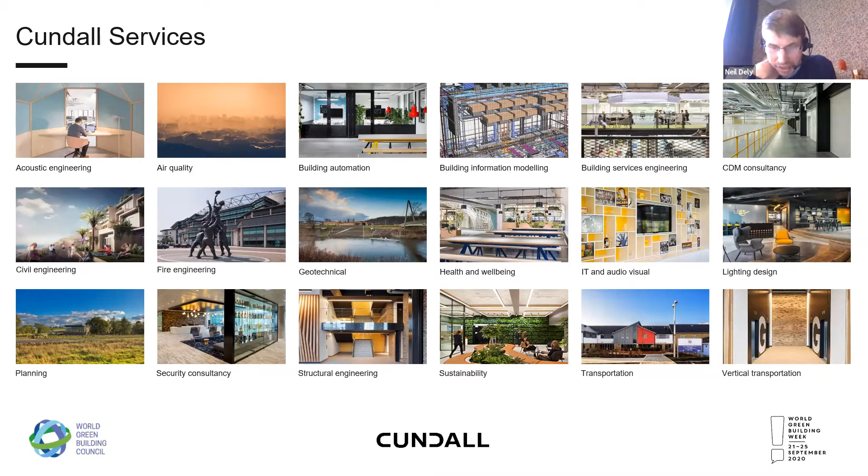We need all disciplines to collaborate to address the climate emergency. And while Cundall offer multidisciplinary engineering consultancy, we achieve the best outcomes when we're working collaboratively with like-minded clients and developers and architects and quantity surveyors and PMs and agents and so on. Next slide, thank you.

So I'm sure you're all aware of the climate emergency. In the recent BBC documentary on extinction, David Attenborough said that habitat reduction is perhaps the most urgent issue to address, but that most scientists agree that climate change is the greater long-term challenge. Next slide, please. And this is a telling slide.

And this will be familiar to you all, I'm sure. Over the past couple of years, we've seen the impact of climate change, and it's become more severe and widespread, and that ranges from the recent and current forest and bushfires in America, previously in Australia, Southern Europe, and the flooding that we see regularly throughout our country.

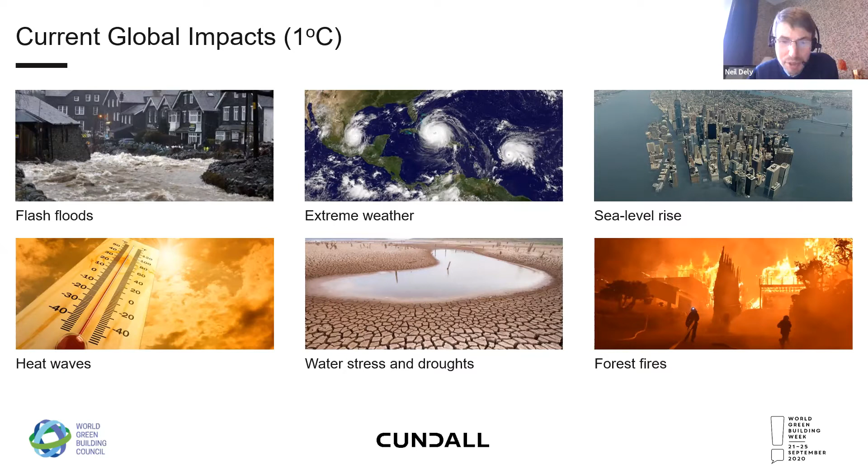It's therefore vital, as I said, that we act, and really, in order to achieve a reduction on the scale required, we need a complete societal transformation to flatten these emission curves that we are seeing and allow our ecosystem to recover and cope. And achieving net zero carbon must be at the heart of our response to this. Next slide, please. So here's a little timeline.

It's not a competition, of course, but what will make us change? And at the most basic level, government regulation will drive us to improve our game. Back in May 2019, the Scottish Parliament declared a climate emergency, and our own government set out legislation to become net zero by 2045.

The UK government then followed suit in June, amending the Climate Change Act, committing the UK to net zero by 2050. And previously in the UK, as I'm sure a lot of you are aware, we'd only ever committed to 80% of that. Unfortunately, the very next month, the Committee on Climate Change reported that the UK was already falling well short of that 80% target. And of course, this implies that it's going to be very difficult to get to this 100% target that we've got between 2045 and 2050. Next slide, please.

And the next driver for change, so if that's sort of national government, the next driver for change can be found in local authorities, and most major UK cities have now declared that they'll be carbon neutral well in advance of that 2050 target, and over 70% of the councils in the UK have declared a climate emergency.

Part of the attraction to cities is that bold climate change action can deliver many benefits, such as better health and well-being, improved air quality, economic savings for individuals and businesses, new jobs, less congestion on our roads, cleaner and greener spaces, and so on.

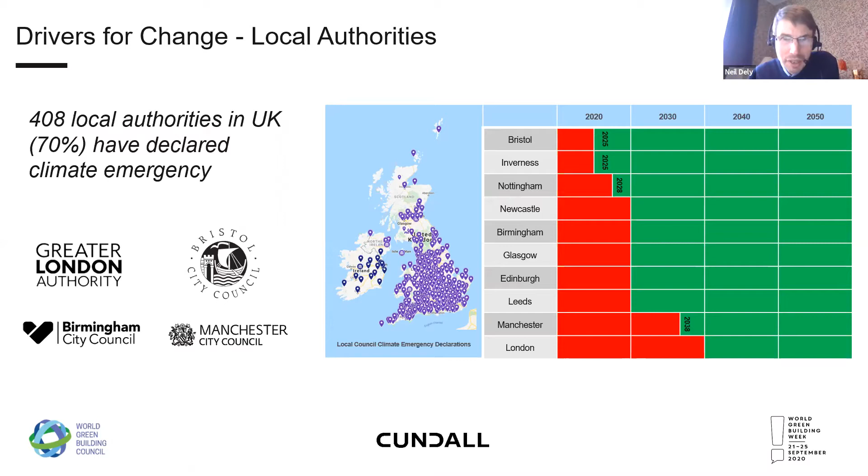So next one, please. And finally, so we've gone from central government to local government, if you like, and then finally the drivers for change. And maybe in some cases this might be the most important one. The drivers are to be found in investors, developers and occupiers.

And it's been good to see a whole swathe of these people sign up to various commitments and the net zero carbon building commitment, and people like Argent and Grainger and Jones Lang LaSalle and Lendlease, to mention but a few. So this is really good when it's also being driven through these type of folk.

So having said all of that, I hope that's whet your appetite. We're now getting on to the really important part of today's talk, the climate triage. And this obviously has a medical connotation, and Sophie will talk you through that.

And to do that, I'd like to introduce you to Sophie. Sophie leads our Edinburgh office sustainability team. Sophie's passionate about delivering low carbon and zero carbon buildings, working with clients to achieve their targets in a commercial world, and all the time looking to give the best possible outcomes for the comfort and well-being of occupants. So I'm very pleased to pass over to Sophie, and she'll take you through the rest of this talk.

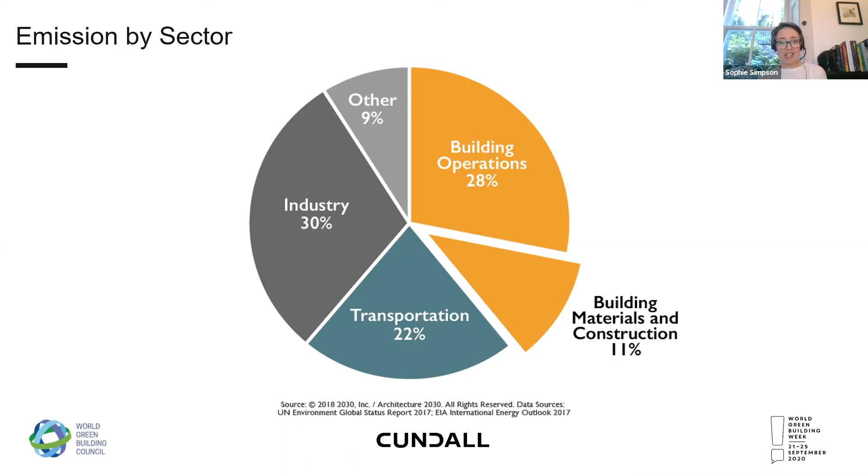In recognition of the role the built environment has to play in tackling climate change, we're now starting to see a consensus among industry in terms of the level of action that needs to be taken. The World Green Building Council has set out their roadmap, and this outlines that by 2030, all new buildings must be net zero carbon in operation. Then by 2050, all new buildings must be whole life zero carbon, and all existing buildings need to be zero carbon in operation.

But in summary, we're essentially looking at first reducing construction impacts and optimising operational performance. Subsequent to that, increasing the renewable energy supply. Then after all this, we again review our resulting carbon balance and identify opportunities to offset. This is a whole different presentation, which I'm happy to expand on if anyone is interested, so just contact us about that. But our recommendation is that it's ultimately a last resort, or at least a short-term fix in any strategies towards zero carbon.

Just to give a bit of an understanding of carbon offset, if people aren't familiar with that, it essentially represents a fee that's paid to enable a reduction of emissions in carbon in order to compensate for emissions made elsewhere, i.e. on your particular project, for example. Offsets typically support projects that reduce the emission of greenhouse gases in the short or long term.

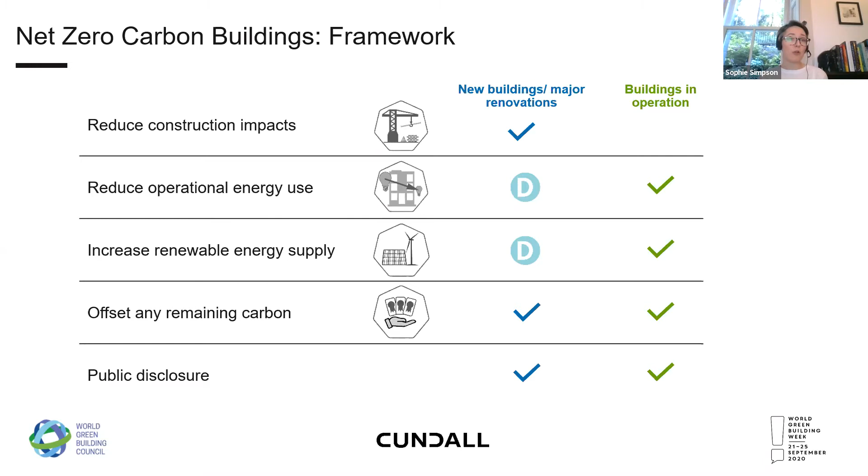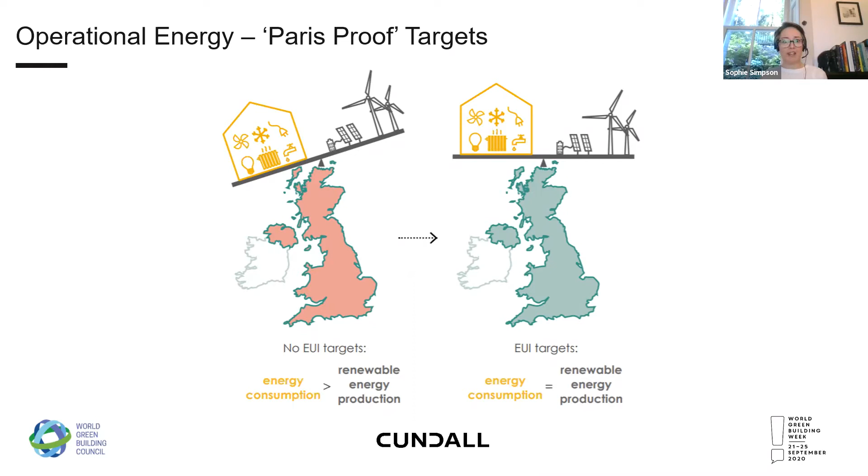So this slide helps to reiterate some of these points, indicating how the building energy use associated with each sector needs to reduce over time, up to a point where this can be matched by the increasing availability of renewable energy, i.e. the point at which we achieve our net zero carbon economy. But we have a lot to do in terms of changing our mindset regarding how we have operated to date. Yes, we have been making inroads, but this has not been getting us nearly far enough. If we continue as we have, we'll get the same results, and I think that's maybe the definition of insanity. But we really need to be pushing further and harder in order to get to net zero carbon.

So other opportunities are that we can include consideration of sharing energy streams across a site. So for example, can we move heat generated in one area to another? So if we have offices that have a cooling requirement, then can we take the heat generated in those areas to heat the residential, or can overheating in classrooms be transferred to heat a pool located on site? We need to start having a detailed understanding of the energy streams within our buildings so that we know how it's going to operate in reality, so that we can best optimise our strategies going forward.

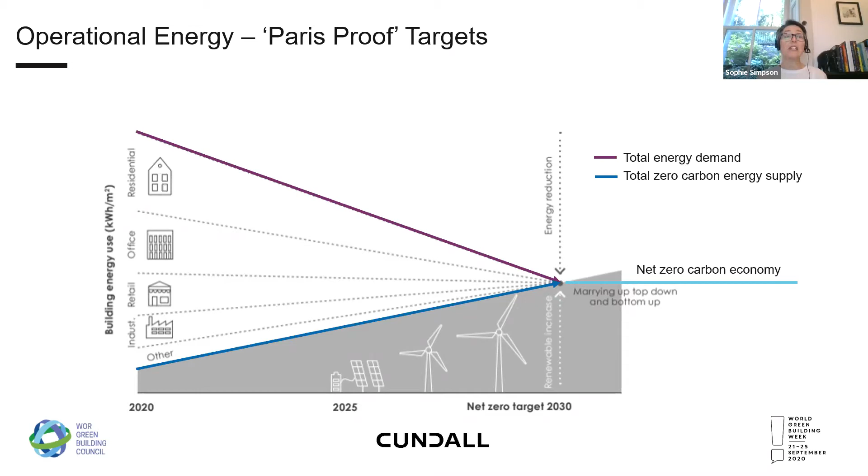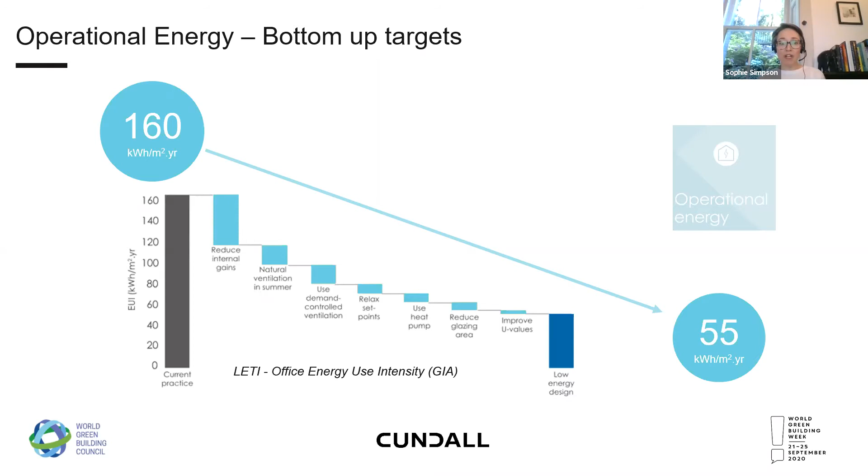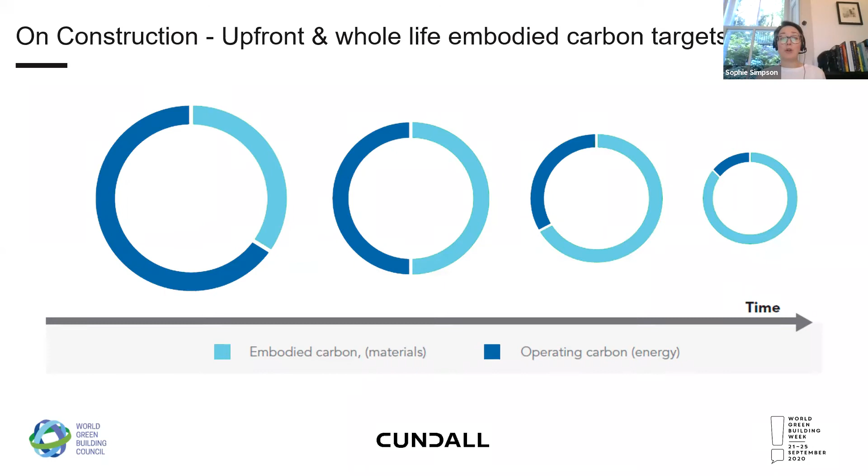But as I mentioned earlier, materials and construction represent over a quarter of emissions associated with the built environment. Where we now have a good understanding of the operational emissions and how we can improve that, it's a case of putting that into practice. What we now need to better understand is the consequence of this in relation to embodied carbon. So in terms of the circles here, they're reducing as we go forward in time because the operational energy is becoming less. But what this means is that the upfront emissions associated with the construction, but also the ongoing emissions in relation to maintenance, repair and replacement works, become more and more significant. So the lighter blue area becomes a bigger proportion of that circle. Fortunately, though, we do have the skills and the tools to at least help us start considering this, even if we're not quite yet taking the action necessary to address this, but we can get there.

In addition to this, we need to start considering, have we designed our buildings for disassembly? Are we using recycled goods? And can the goods that we do specify subsequently be recycled or reused at the end of life?

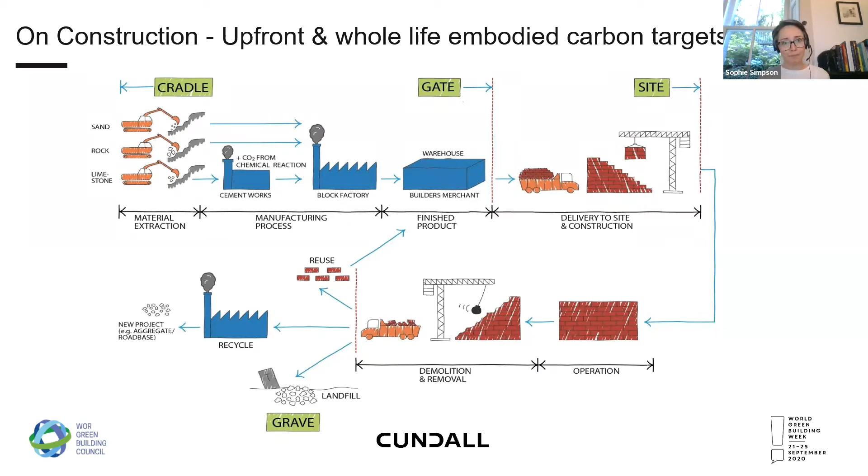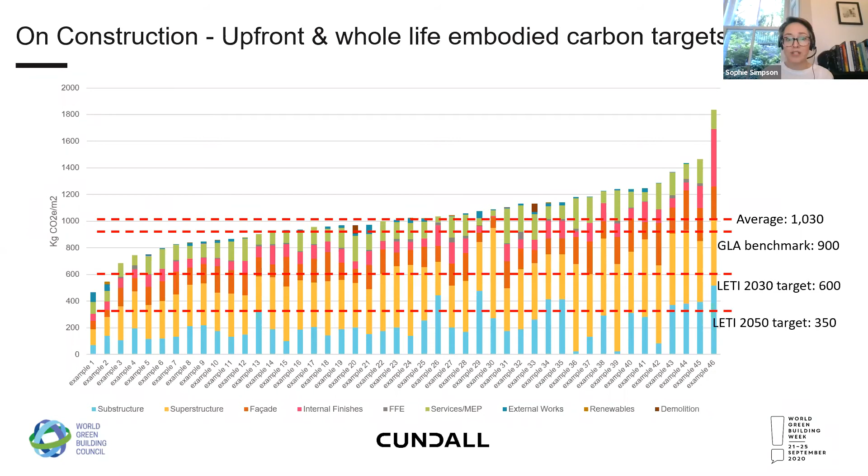So starting with 1, passive design optimization, then further seeking to reduce operational energy demand by introducing optimized efficiencies and performance. Our 3rd step is elimination of fossil fuels where we can. And subsequent to that, providing on-site renewable energy and storage when it's possible, but also considering step 5, limiting upfront embodied carbon, and 6 is consider whole life carbon in conjunction with whole life costing. The final stage is 7, which is publicly disclosing performance annually using the RAP database, and it's that public disclosure that's key to encouraging movement in this area, and holding everybody to account essentially.

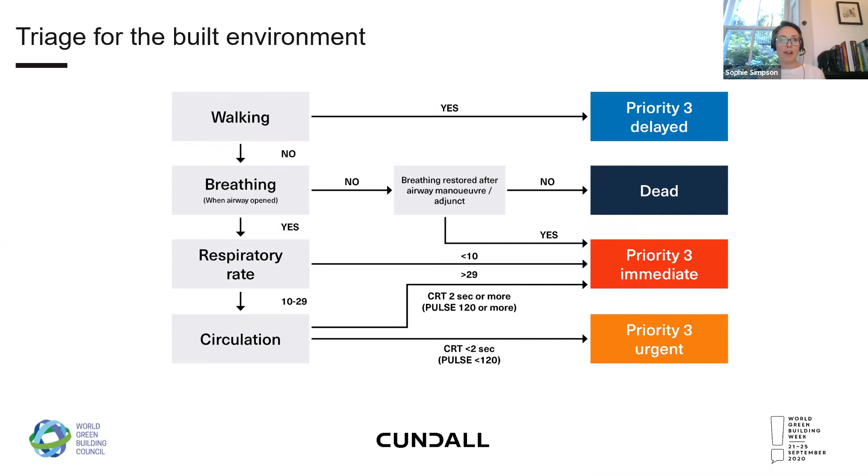And finally, which buildings are essentially not going to be here in 2050 or don't have a place in our 2050 future? We need to ask if it's worthwhile continuing to act on these buildings, or do we need to focus our efforts on where we can make an impact? Now, I'm hesitant to suggest it's the end of the line for these buildings, but perhaps when I come back to discuss the embodied carbon aspects, the reason for my hesitancy might become clearer. But ultimately, the main function of our triage approach is to identify the appropriate level of care based on the urgency of action required. So, where to start?

We've identified, based on the relationship we've had with our clients, 3 key levels at which we're being asked to assess net zero carbon strategies. So we have this at a corporate level, where we're looking to reduce emissions across the whole organisation over a reporting year, taking into account day-to-day operations. This essentially includes everything from, for example, how staff get to work, business travel, maybe where you're sourcing your paper, pens or coffee. But primarily focusing your attention on where you can make the biggest impact.

And schemes that are available to help support this are, for example, science-based targets, which allow organisations to demonstrate the efforts they are putting in place to operate within the 1.5 degrees Celsius limit of global warming.

At the other end of the scale, the bottom bar here is the individual asset. Here we are considering the operational performance of the building as well as the associated embodied carbon. Whilst existing buildings may not have the upfront emissions from construction, we do still need to consider the embodied carbon associated with any maintenance, replacement, repair or even refurbishment strategy associated with those buildings. And what are the end of life implications? Can we disassemble? Can the materials be reused, recycled and so on?

I've already touched on a number of frameworks and guidance setting targets for this, for example the LETI, UKGBC, RIBA and RICS methodologies. But in between the corporate and asset level, we then have our portfolio level. This is where we're looking to collate information relating to all building assets owned or operated by an organisation. So much effort today has been focused on the scope 1 and 2 emissions, but we really need to start considering our scope 3 emissions. And I'll go into more detail on this later.

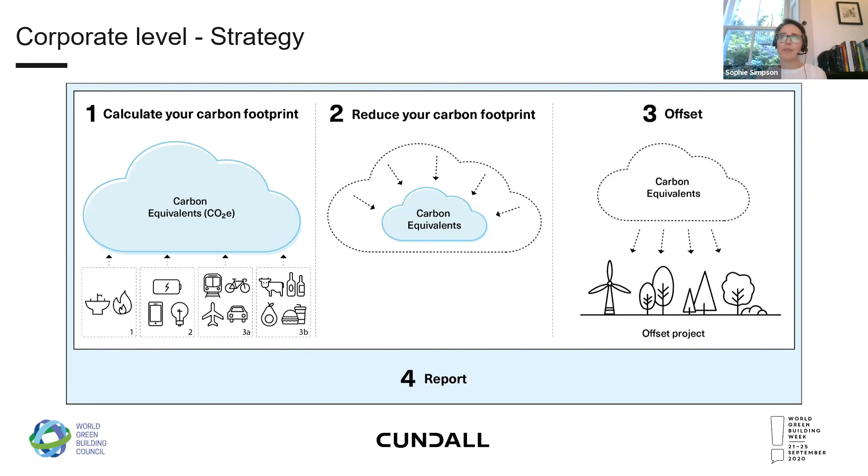So once we understand our footprint, and once we have implemented all efforts to reduce our carbon footprint, only then, and I emphasise that this is a last resort, might we start to consider our offsetting strategies. So what are we including when we consider our scope 1, 2 and 3 emissions? Just to provide a bit of an overview, apologies if you are already familiar with this, but our scope 1 emissions are our direct emissions, i.e. those that come from sources owned or controlled by the reporting company.

So this represents any fuel combusted on site, for example, gas boilers or oil boilers if you have those, but it's also considering refrigerant emissions. What are the maintenance strategies associated with this, or what do we need to consider at the repair and replacement opportunities? But these questions apply across all plant equipment and all building components.

If we then have our scope 2 emissions, this is our indirect emissions. So those that are a consequence of the activities of the reporting organisation, but that occur at sources owned or controlled by another entity. So for example, the utility company generating the electricity. So electricity is the immediately obvious example, but within this, what we are also including is any purchased heating, cooling or steam.

As you can see, what we have done to date is relatively simple, but if we then go on to include scope 3 emissions, we start to get a little bit more complicated. So here, we've got 15 additional categories introduced within scope 3, and this is all based on the Greenhouse Gas Protocol methodology. This is divided into 8 upstream emissions, which represent any emissions that you can influence through choice or selection, and 7 downstream emissions, which represent those based on services that you offer to others and the associated emissions with those.

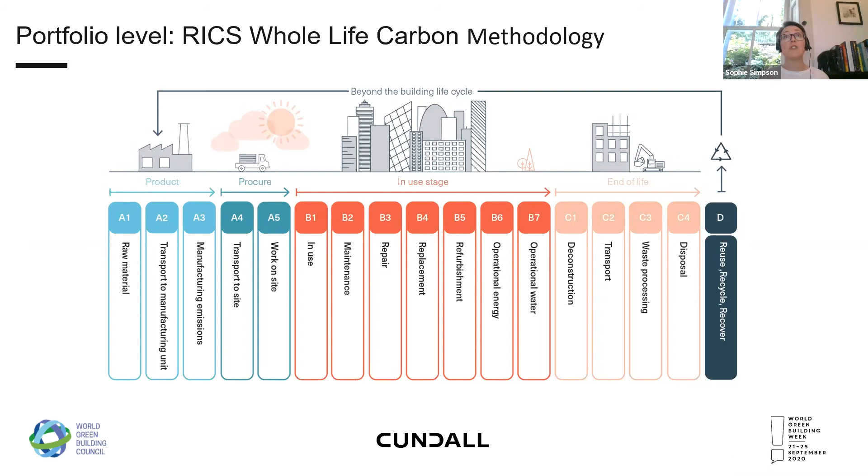And this involves detailed modelling undertaken during the design stages, but which continues to follow up subsequent to completion of the building in order to review performance and check that it is operating as expected. This is having a massive impact. So, for example, in Australia, it's helped to demonstrate the quality and effectiveness of the building design, and as a consequence, they're able to determine higher rental yields for NABERS rated properties.

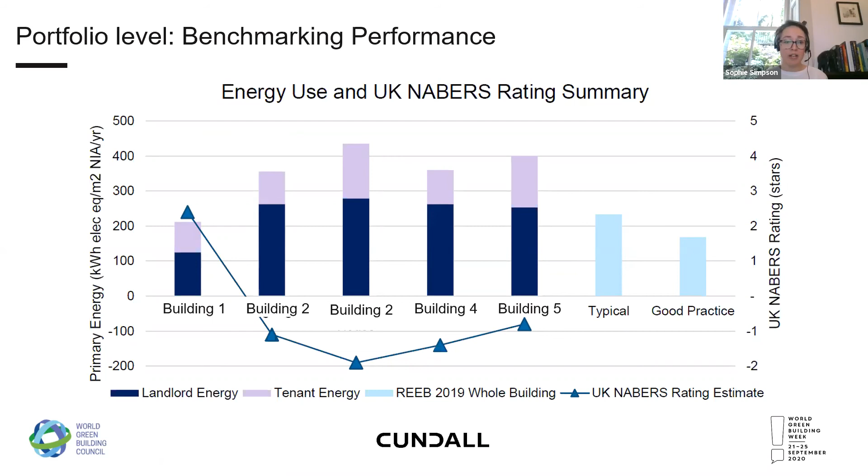And as I've touched on, part of the challenge is identifying where we can make an impact. And so this slide touches on a really interesting project we've been doing with Newcastle Council to undertake a portfolio analysis. And essentially what we've taken is existing available data sources describing their building stock. So obtaining that from energy performance certificates or the display energy certificate databases, and using this analysis to strategically consider the building performance. So for example, this has allowed the easy identification of problem buildings.

So essentially they're outliers. So in this instance, I'm taking that to mean buildings which are demonstrating a much higher energy consumption than is expected or typical for a building of that type. So for example, what this allows us to do is zone in really quickly on what buildings are demonstrating Fs and Gs as well. So what buildings are they going to have to take immediate action in order to improve the EPC rating? And through this quick identification, what we can start to understand are the contributing factors and identifying those, and then developing a strategy to reduce energy consumption.

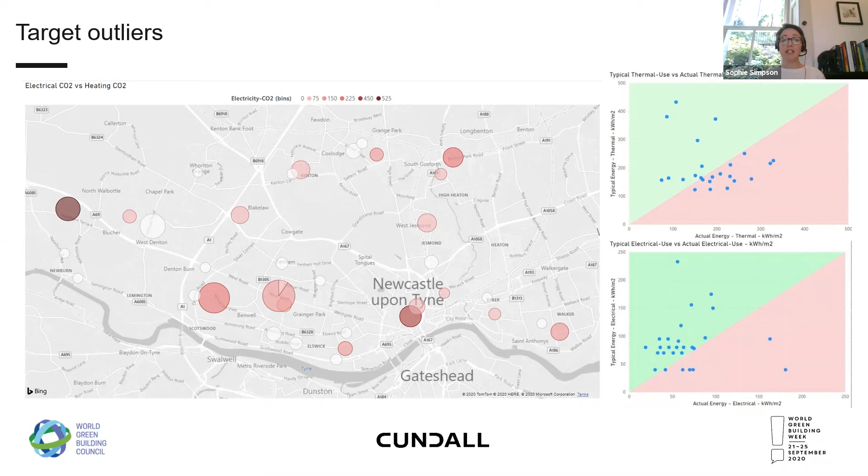And a great benefit of this exercise is that, as I said, it's using existing available data. Therefore, this has allowed us to continue this exercise over lockdown essentially, and thus enabling Newcastle Council to continue to demonstrate progress with regards to efforts towards achieving emission reduction. And so this brings us quite neatly to move on from understanding our portfolio performance to what we are doing for individual assets once we've identified the action necessary.

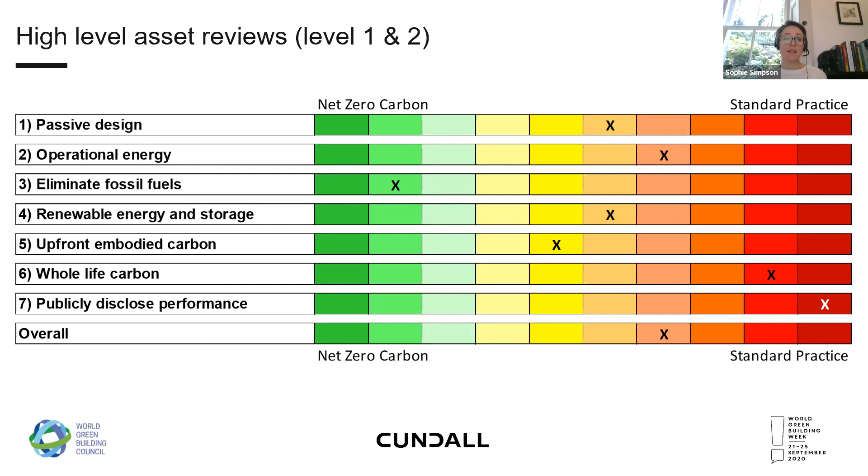And as I mentioned previously, Cundall have developed this 7-step strategy, so we've outlined this here. And we're using this to undertake a high-level review of the building asset, so identifying its performance, how this compares to standard practice, and what level of action is necessary to get it to net zero carbon performance. So once we've understood the current performance, then we can start developing strategies in order to improve performance.

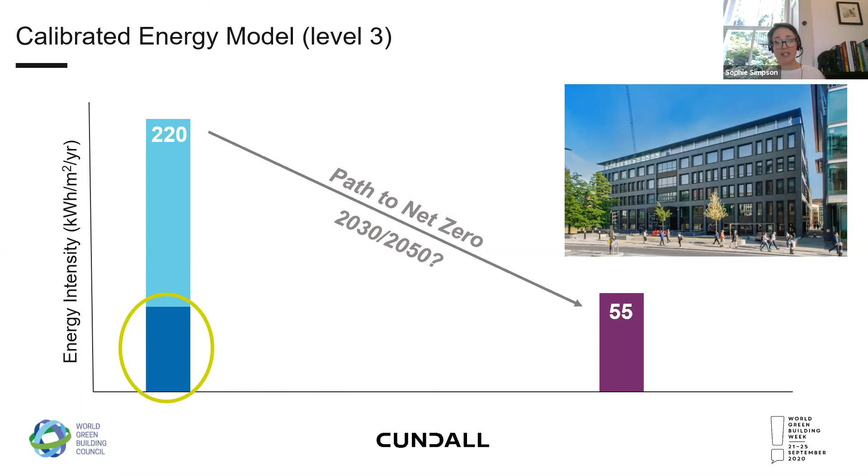And so using our energy modelling to then assess the range of technologies that can be implemented, but also calibrating that against real energy data that we've taken from the existing operational performance. And so what this allows us to do is reflect on the actual operational requirements as suits the need of the occupant for that particular building.

And this is very much distinct from the modelling efforts for Section 6 of the building regulations, which are solely to test the performance relative to comparison, or to provide an easy comparison of buildings on a like-for-like basis. Therefore, the Section 6 does not reflect how they will be used in practice.

So based on that calibrated model, we can start to identify appropriate and effective carbon reduction efforts and develop a route map to implement over the years to achieve the ultimate energy use intensity target. And it's worth noting that that energy use intensity target is the value even before renewables are considered, because the purpose of the renewables is to offset that 55 value.

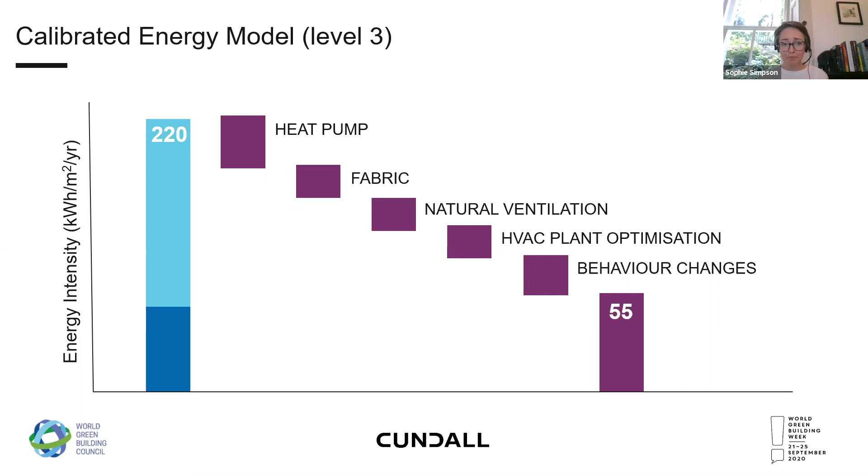So for consideration of that route map over a number of years, this then allows us to develop a strategy that can take account of existing maintenance strategies, but also any future planned replacement or refurbishment schedules. So that allows us to start to identify opportunities to implement efforts that tie in with scheduled works, or for example, the introduction of new leases, thus minimising the level of disruption associated with the process whilst maximising the potential benefits.

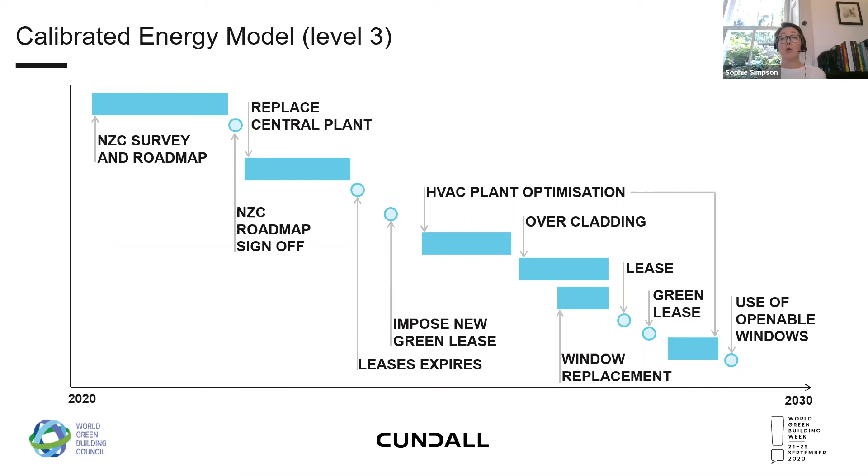understanding the control strategy for our heating and cooling to avoid simultaneous responsive systems, turning stuff off out of hours. Like, it sounds obvious, but it's easily overlooked. Separate plant for out of hours usage, and insulating pipework and water heaters, or introducing new fans for air handling units.

In terms of key considerations, then what we're looking at is optimising glazing performance, improving thermal performance, improving air tightness, introducing openable windows. So even if we are going to high airtight buildings, we still want to have that window opening strategy to mitigate overheating in the summer, and also be used as an opportunity to offset this mechanical strategy, so it's not being used 365 days of the year. And that enables us to adopt a mixed mode ventilation strategy.

But further to this, then looking to phase out the use of fossil fuels where we can, relax heating set points. So can we encourage our occupants to put on another jumper, or can we encourage movement around the office so that they can sit at an area of the office that suits their temperature preferences, but also reducing internal heat gains. And a consequence of all of these is that then allows us to reduce our MEP equipment sizes, and the additional benefit is reducing capital costs, and then also looking to maximise on-site renewables.

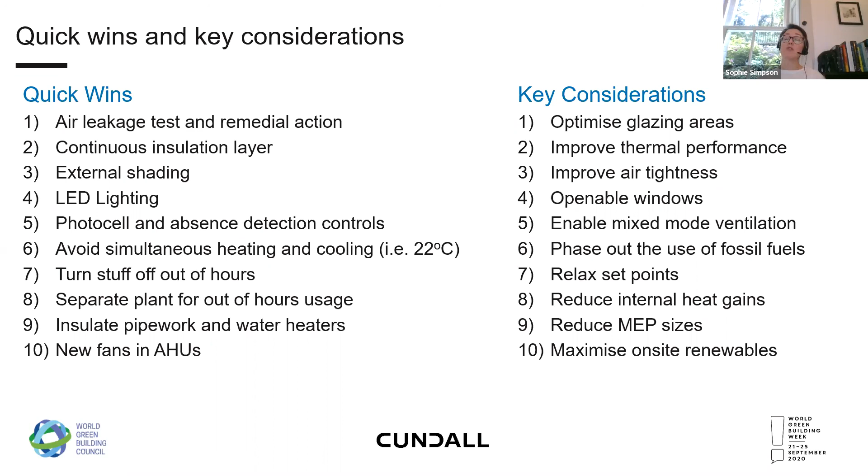So in terms of the services that we offer at Cundall, as I say, we've got our corporate strategy and reporting. So that's where we're undertaking these carbon footprinting exercises or carbon neutral certification, working to consider supply chain charters or procurement strategies to help reduce the scope 3 emissions, carbon offsetting strategies, and developing climate change risk reporting.

For our portfolio strategies and roadmaps, it's development of those strategies and roadmaps and looking at those for existing assets as well. And then we have our usual services in relation to net zero carbon buildings, so developing those strategies, passive house certification, operational energy assessments, design for performance, which we really believe is going to have a massive uptake going forward, upfront embodied carbon assessments, and our whole life cycle assessment.

And so this ultimately brings us to the point that the cost of inaction is greater than the cost of action. So as I've said, it doesn't have to be a complex process. It can be incorporated within existing plans and strategies, and this will reap multiple benefits in terms of minimising the impact on the environment, but also improving the sustainability credentials of the associated organisation and improving the quality and value of that building stock.

So therefore optimising its resilience relative to climate change, but also relative to dropping value.